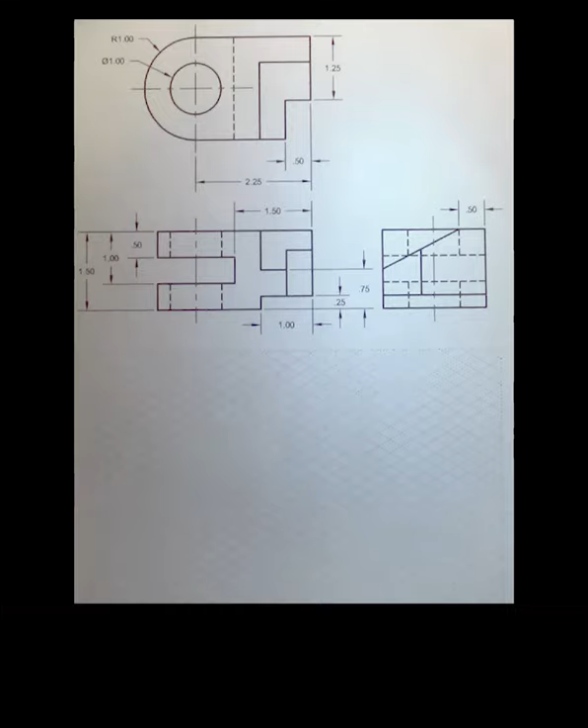In this video, we're going to create an isometric pictorial of the object shown. This object is fairly complex, so we're going to take it step by step, and this video will be broken up into several parts.

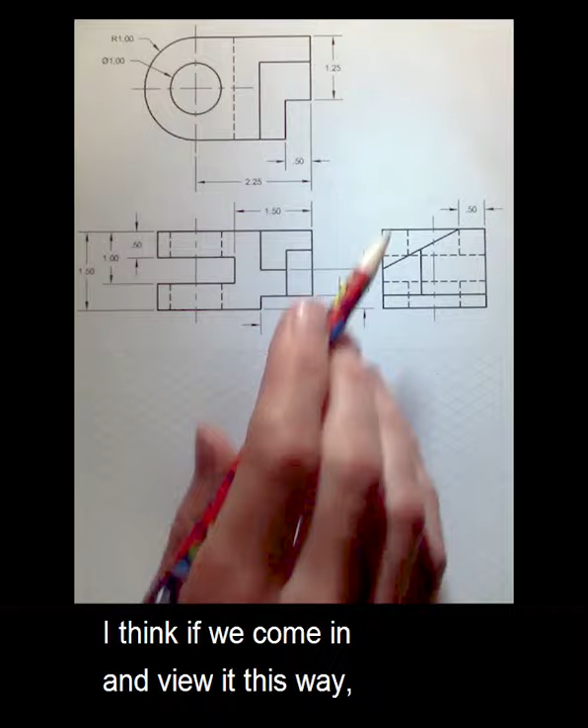The first thing I want to do is determine which way I want to view this object. I think if we come in and view it this way, that would show the most. So that's what we're going to do.

So we want to draw a defining box that's 2 1/4 plus 1, so that's 3 1/4. Then this direction would be 2 because that's a radius of 1, and then 1.50.

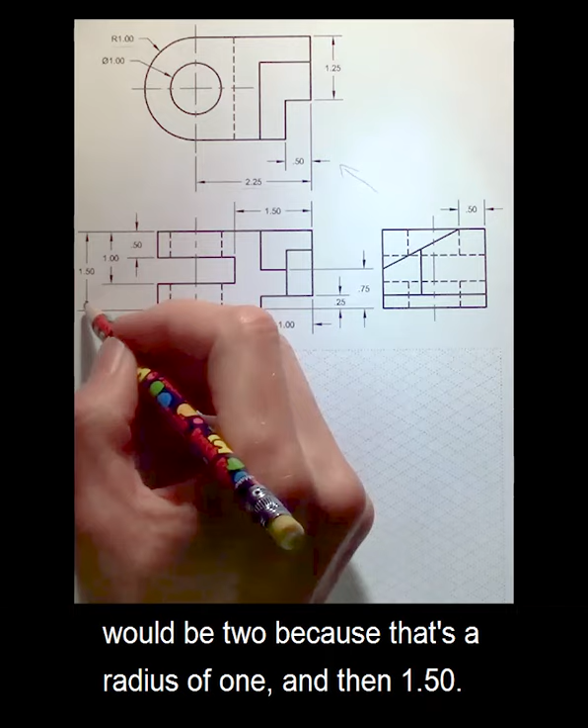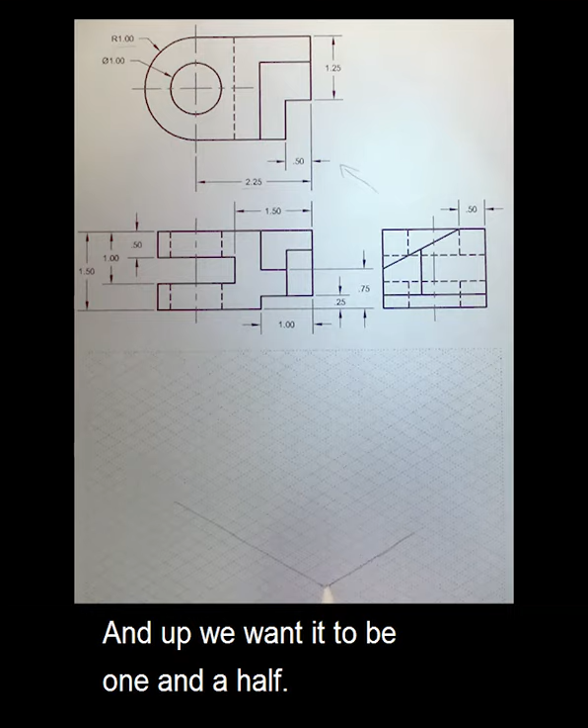Alright, so we will do 1, 2, 3 1/4. We're making each one of these 1/4 inch. And then over, we want it to be 2. So 1, 2, and up we want it to be 1 1/2. So 1 1/2, and we'll just fill all that in.

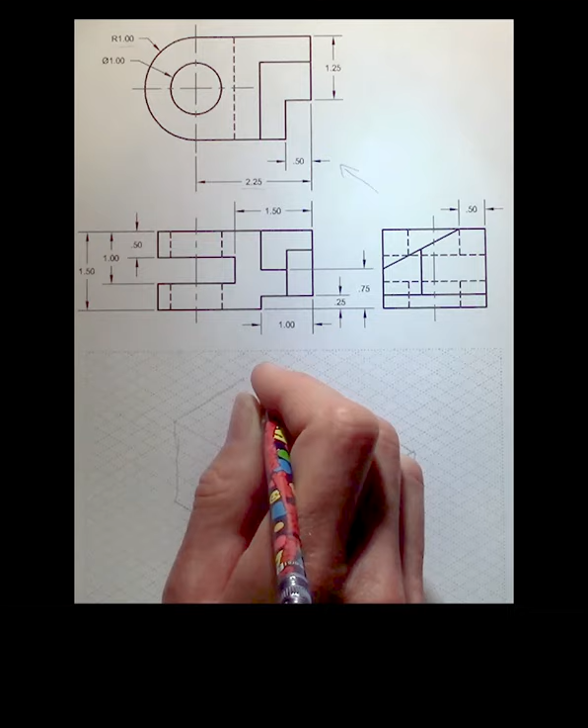And there we have our defining box. So our radius will be over on this end, and then we'll be able to see all those cutouts over here. So let's start with the radii.

So we want to draw a defining box that's 2 by 2. So that's 1, 2 right there.

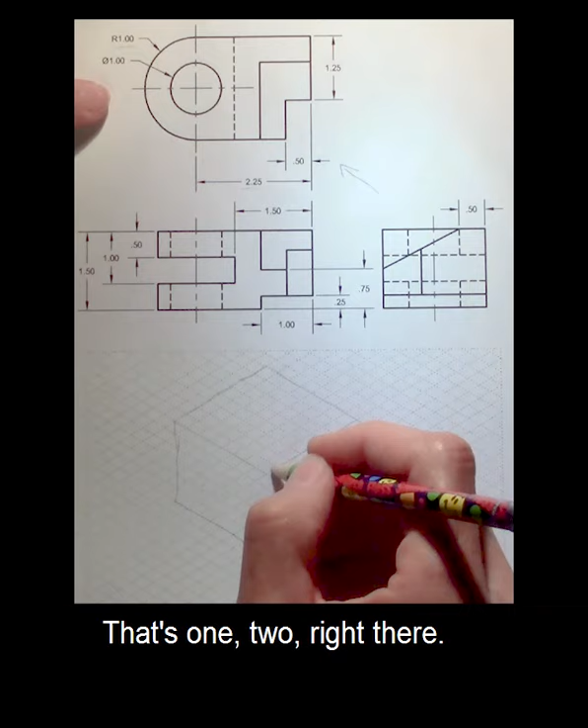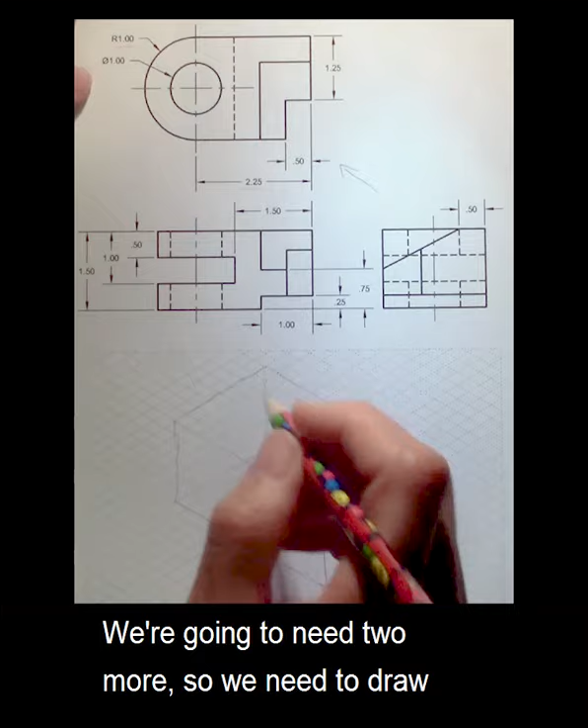Alright, so we have 1 on the top, 1 on the bottom. We're going to need 2 more, so we need to draw a radius on the top, on the bottom, and then we need to draw one here and here.

So let's start by just drawing the ellipses for the top and the bottom, and then we'll get the other ones.

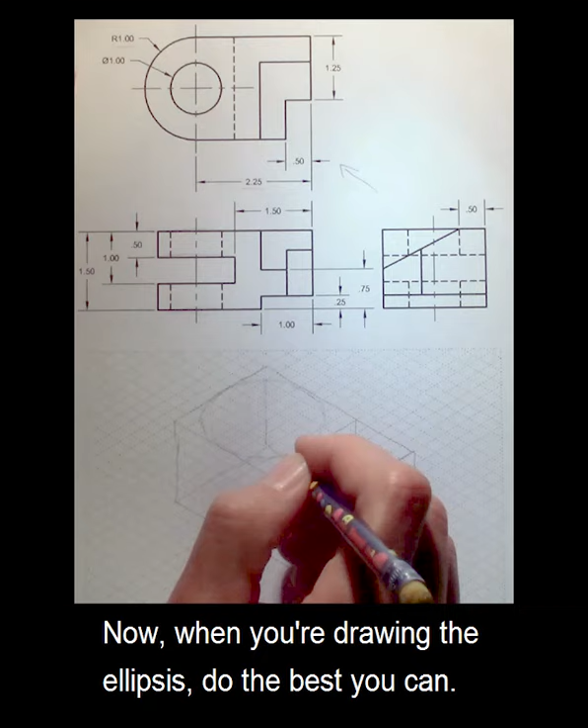Now when you're drawing the ellipses, do the best you can. You might need to go back and adjust as needed.

Alright, so there's the top and the bottom. Now let's put in the other 2 levels.

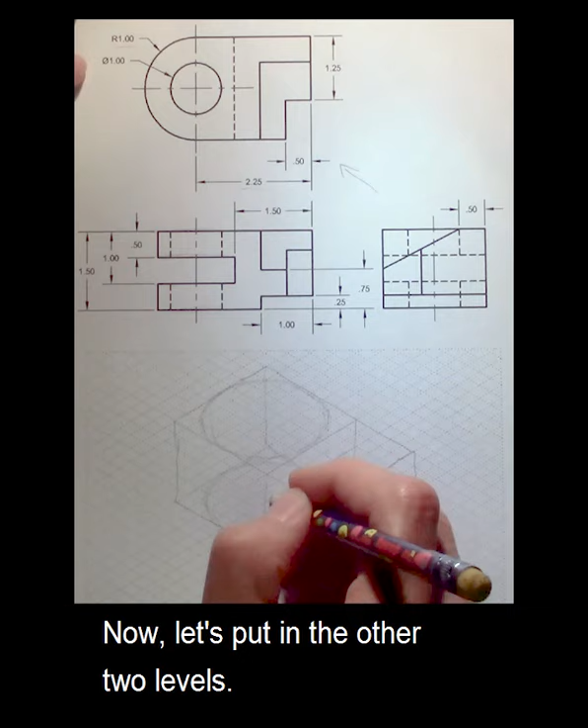They're 1/2 inch down. So I drew my box there and draw my other ellipse. And that one's a 1/2 inch down from the one we just drew.

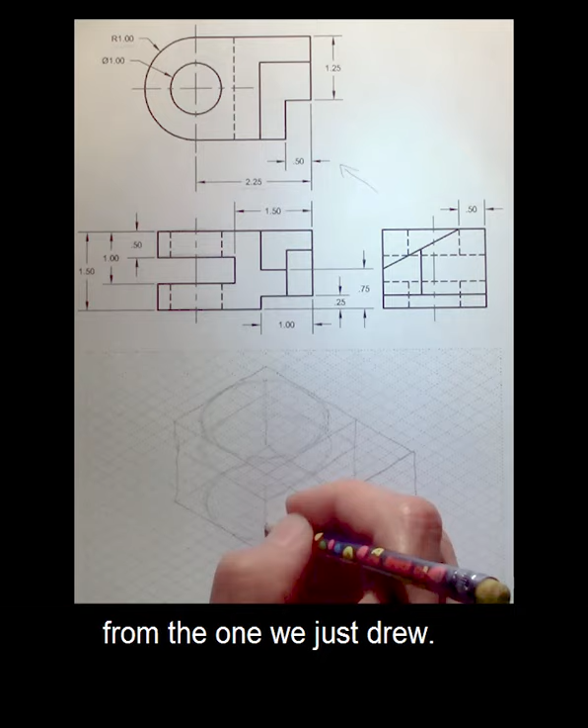Now there's a lot of circles, so it might be a little confusing. You might want to get in there and erase what you need to erase. But you can see there's four circles.

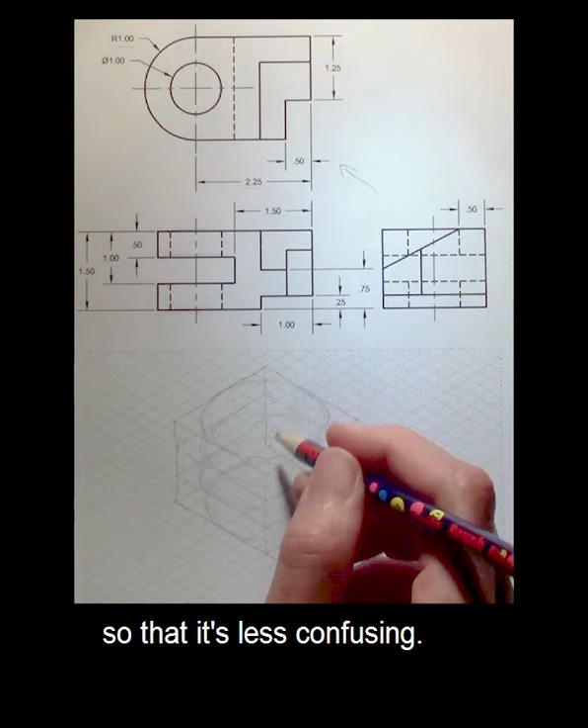Alright, so let's darken in a little bit so that it's less confusing. So we're going to have a radius on this end. Right here, it'll attach up with this one right there. These will attach up.

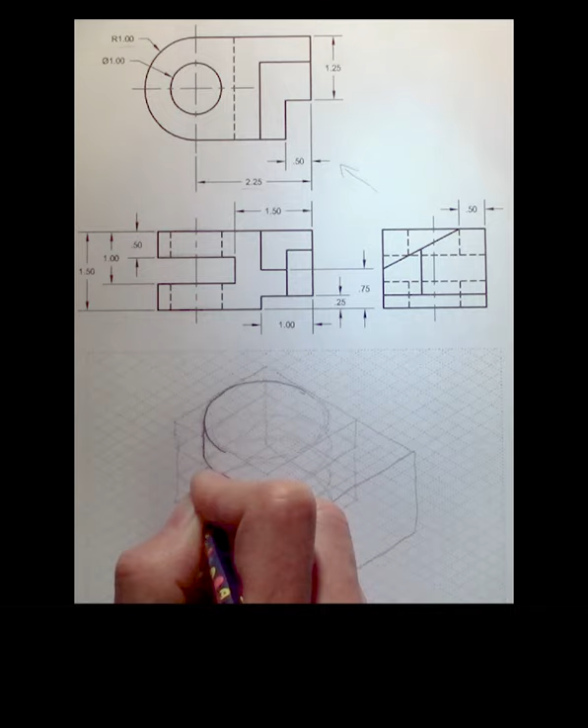So you can see the 2 different levels. Alright, so the next video we'll start constructing the cutouts over on the right side here.